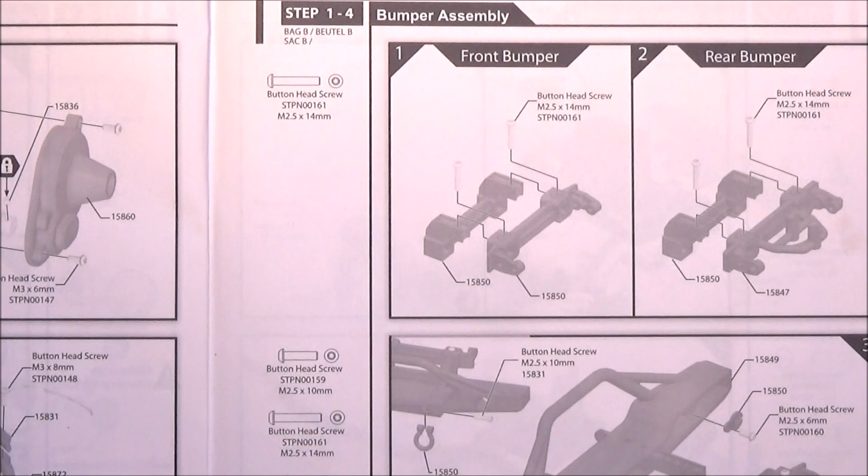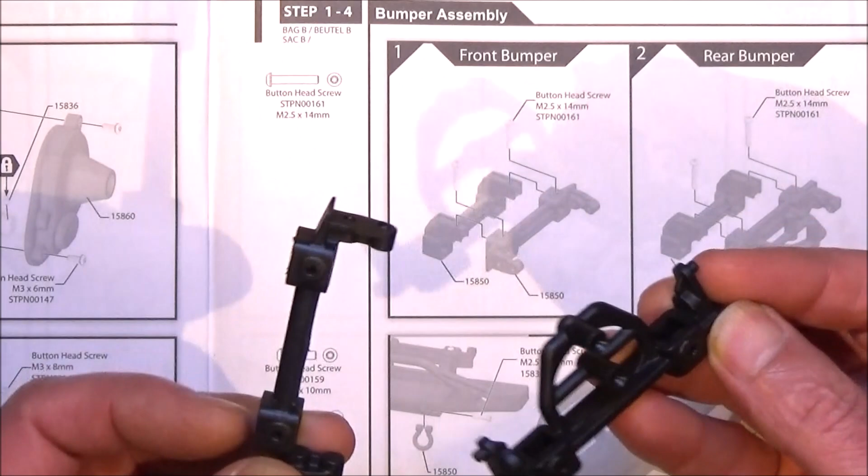Last time we finished bag H, so it's time to open bag I. This is for the bumper assembly, but I'm not fitting the bumpers onto my Range Rover, so all we need are these two parts, which fit on the chassis rails front and back. So that was nice and easy.

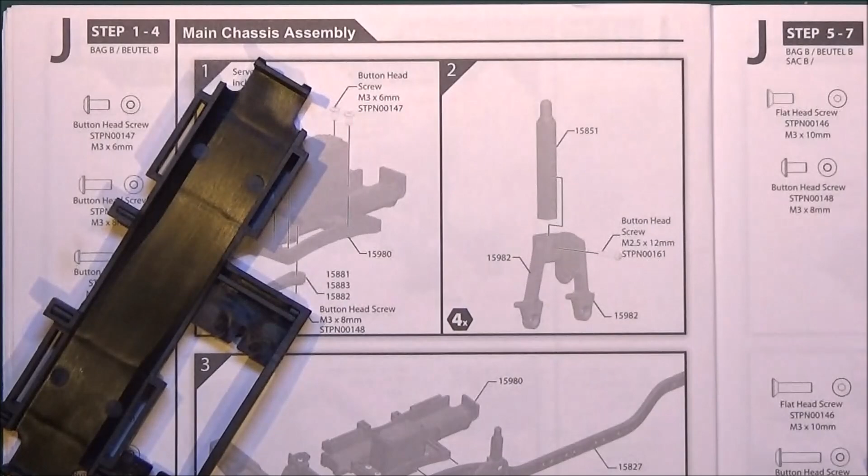Straight on to bag J. This is where we start to assemble the main chassis. What we're going to need is this piece here, which is going to hold the servo, and you need your servo, obviously not supplied with the kit, and you need to fit on the servo horn.

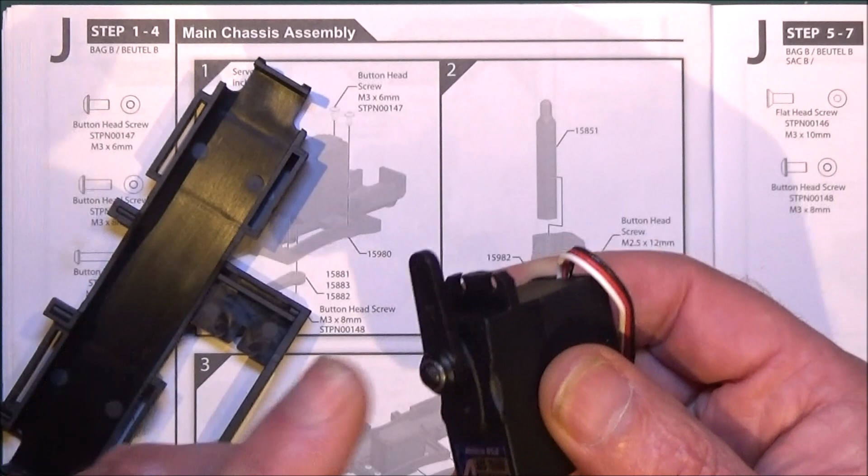There are 3 supplied for 23 to 25 tooth splines, and you need to fit that on with the screw. A bit of thread lock is advised, and then we just need the 4 6mm screws to hold this in, with the servo horn pointing towards the front like that, so I'll get those 4 screws in.

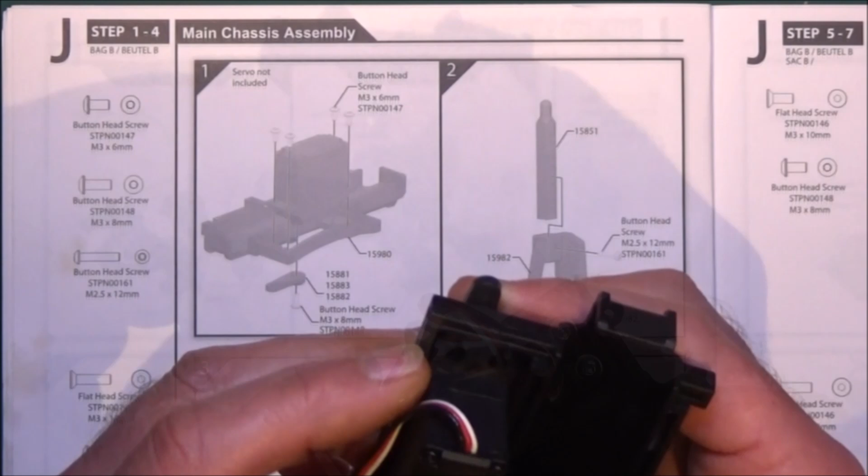So you can probably see the 4 screws there. I've used some spare stainless steel ones that I've got, and put some washers on also. So that part's finished, and I'm going to use more of those stainless steel screws wherever I can, the ones I've got that fit anyway.

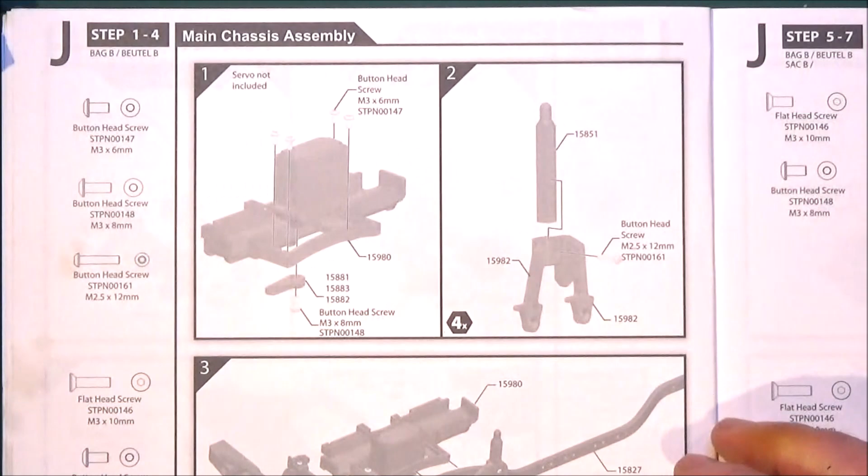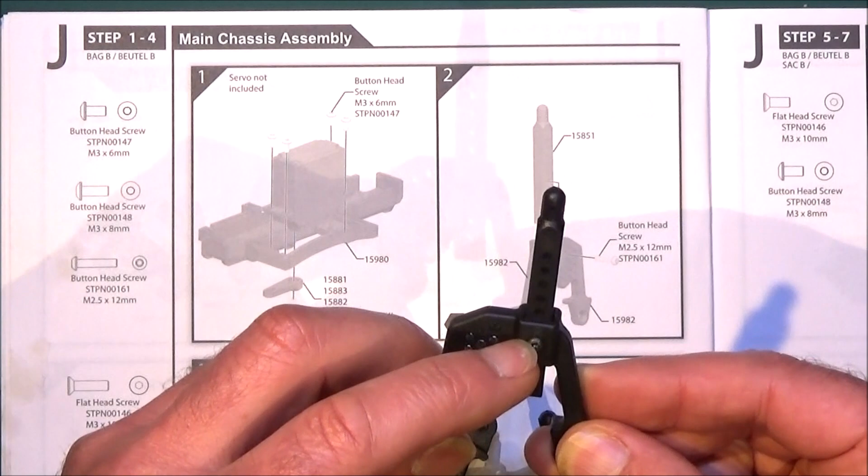Step 2 is just making up the shock holders and the body posts. Depending on your kit, for the Range Rover, the ones in the rear you have to put on the 4th hole from the bottom. So put the screw through there, and on the front you see there's an F denoting this is one of the front parts.

You need to put it on the 6th hole up from the bottom for that screw. So make 4 of those, and let's get on with step 3.

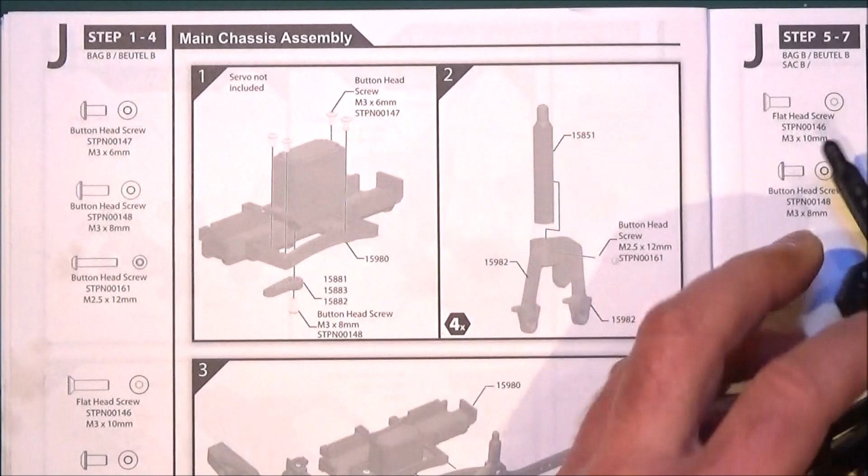This is where we're going to need for the first time one of those metal chassis rails, and I think it's the one with the curve that points towards the front. Obviously the bent channel goes to the inside, and we need to screw these together.

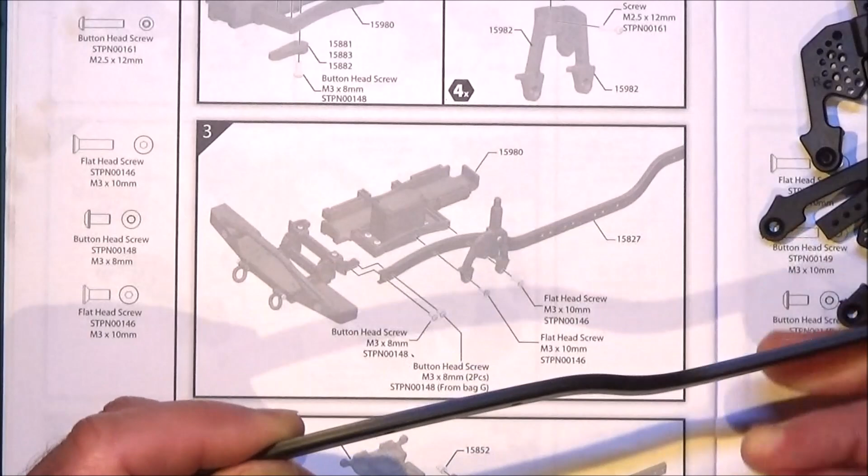So we need the front left, so there's an F and an L. Okay, that's the 4 screws in - there's the 2 countersunks and the 2 button heads, and that's the end of step 3.

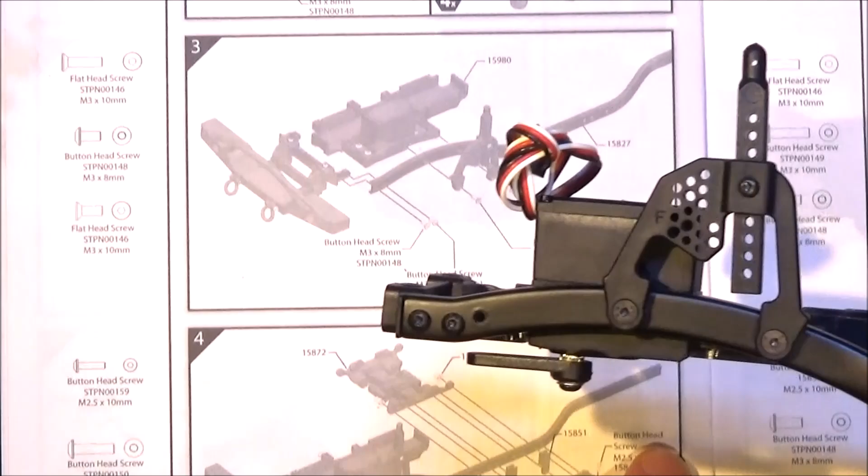So on to step 4, where we're going to be attaching this centre part and the rock slider on the side. There's also 2 little battery clips it looks like, so I'm going to screw those on first, I think.

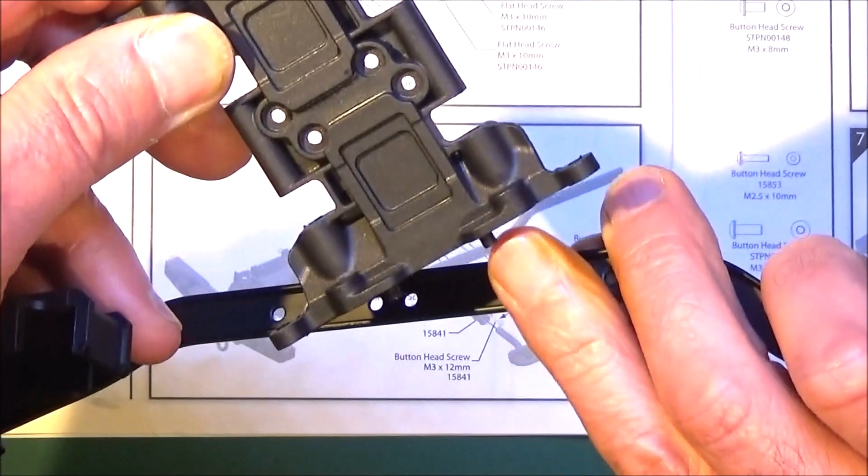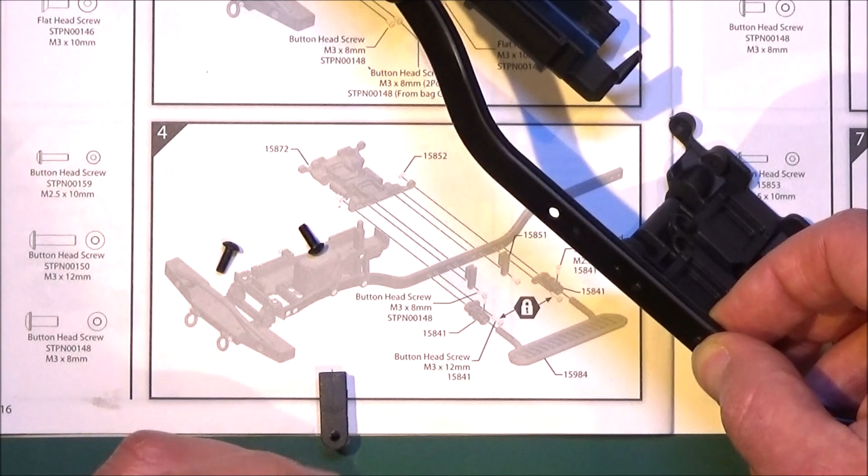This has got 2 lugs that go through those 2 centre holes, the middle of the row of 8 holes, like so. Then we've got these 2 clips with the 8mm screws that go on the next hole out, I think. Okay, like that.

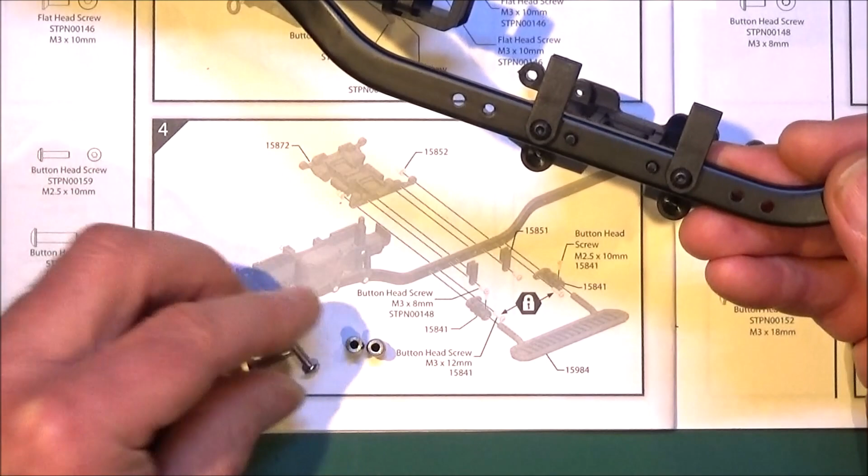And then we need the 2 ball joints, some 12mm screws, and 2 of these, and that's going to go in place like so, with the ball joint holding it all together. So do the same on the other side and nip those up.

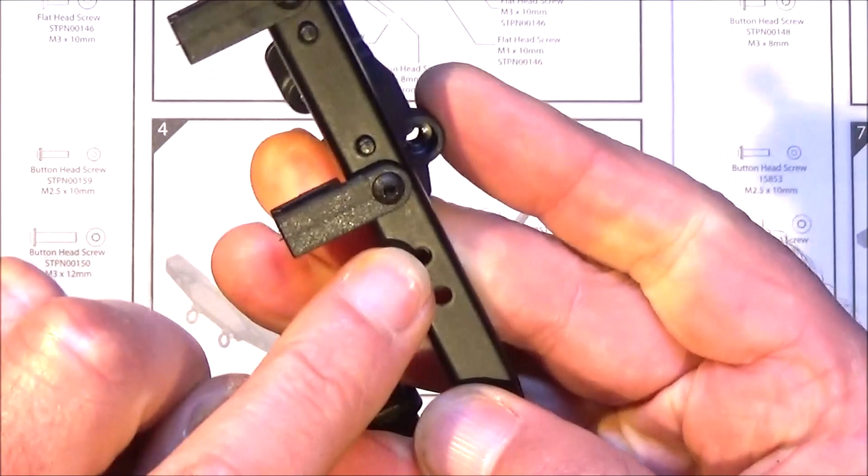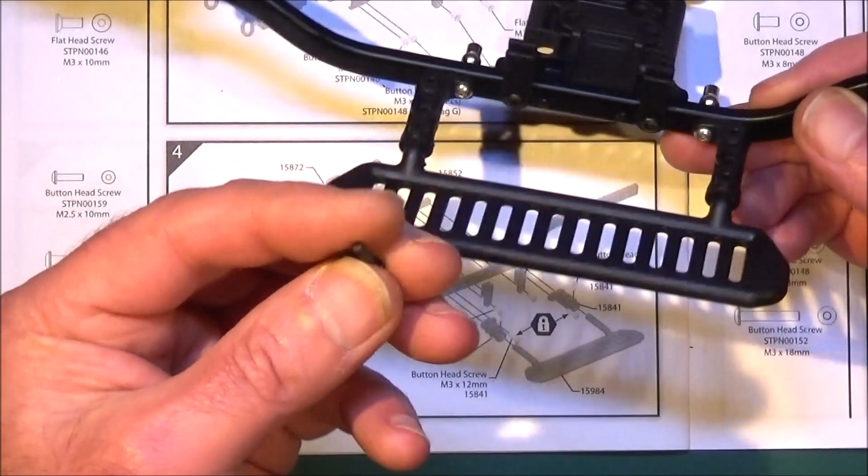So it should look something like this, and all we need to do now is get this rock slider, push that in as far as it will go, I think. It shows here 10mm long, 2.5mm wide thick screws, but the only ones I can find left in the kit are these, about 13mm long, so they're the ones intended for it, I assume. With the 2 screws, one there and one there, that's the end of that step.

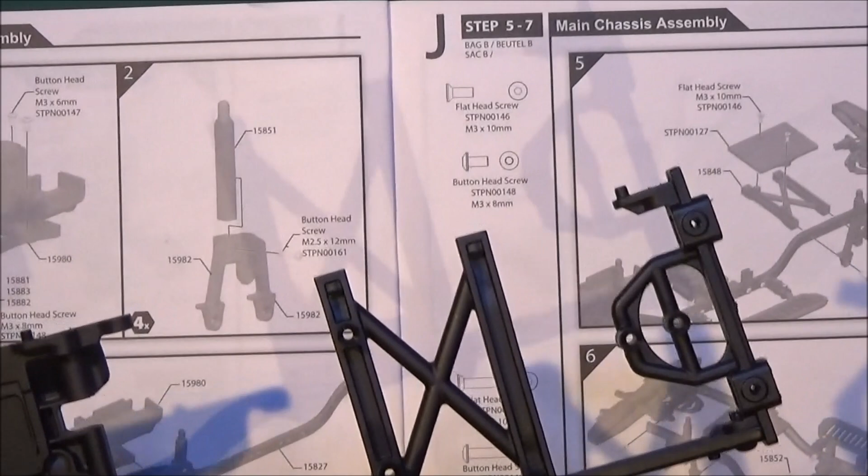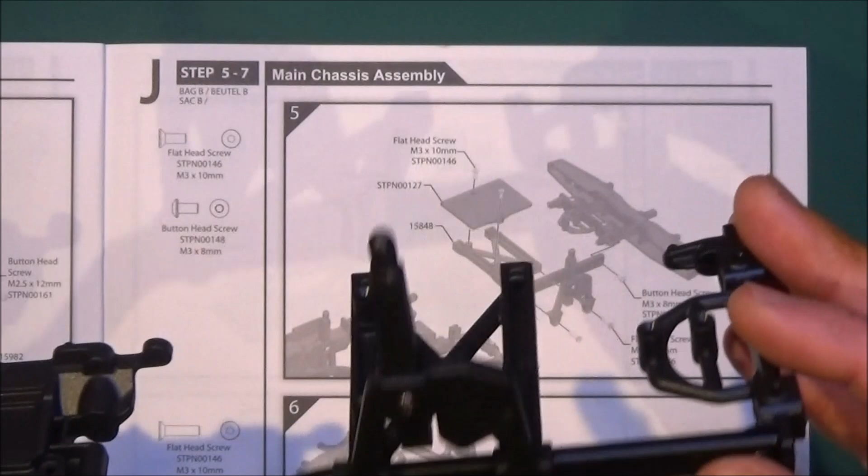I've also skipped on to step 5, which is attaching the other shock holder and body post holder. You've got the R there for right, and an L for the left hand side of the chassis. Then there's this cross piece here, which fixes on through there with the 2 countersunk 10mm screws.

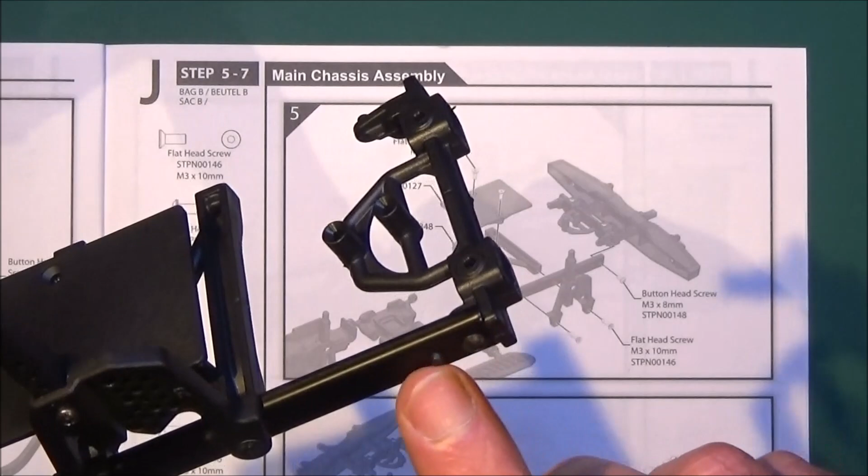All we need to do now is get this part, this flat tray, and that clips over these 2 lugs, and we're going to put the 2 countersunk screws in there, not forgetting to put the rear bumper mount right on the back, just 1 8mm screw holding that on.

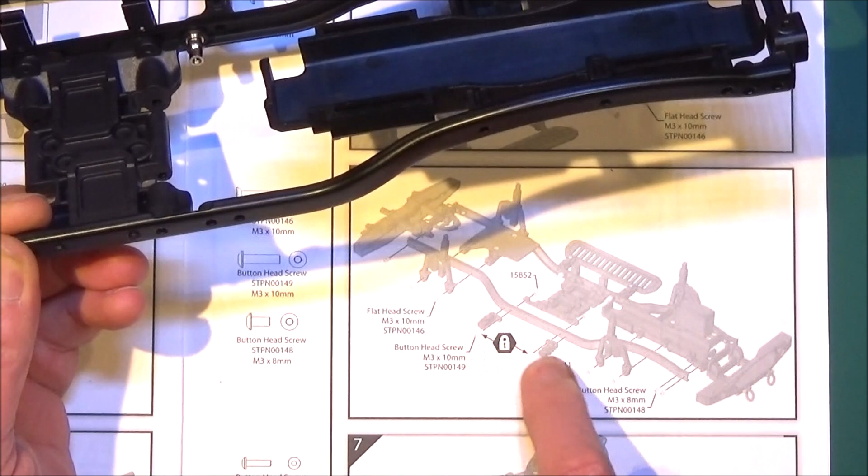On to step 6 then, where it's time to fit the other side of the chassis rail. Again, you've got these little lugs that are going to fit through the rail. It just gets it all aligned, and then we're going to get those two pieces again that hold the rock slider.

There's the ball connectors mounted with a bit of thread lock. I've also put on the shock carriers, the top shock mounts, the 10mm countersunks there, front and back.

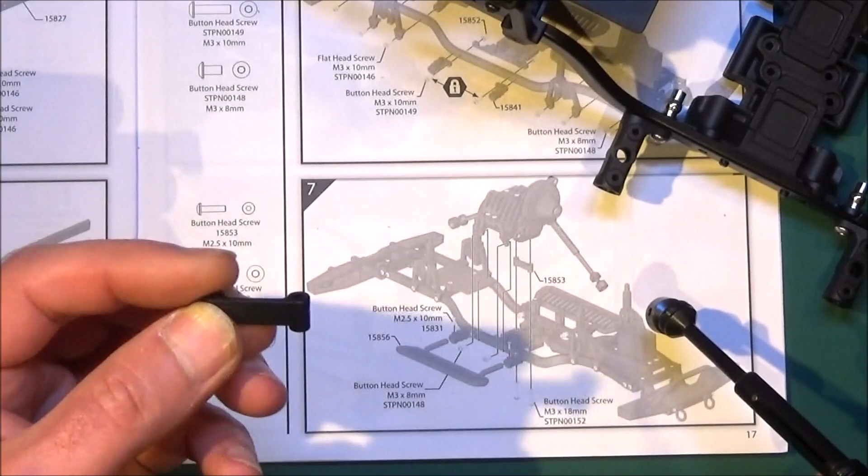Note the alignment, and there's one screw to go in the back and two 8mm in the front. On to step 7, where we're going to be fitting the motor and transmission. This needs this small plastic part that's going to fit onto the bottom of the differential, and then that's going to screw from underneath. So we're going to locate that into these holes here, or this slot.

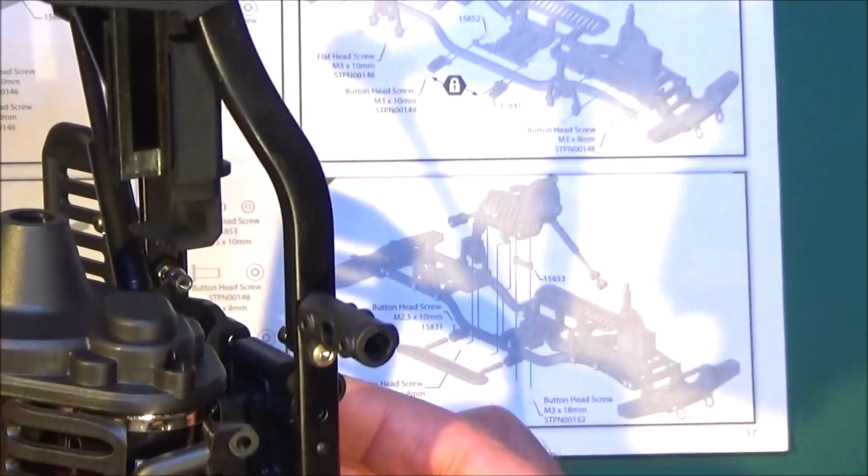I've just placed it on this central piece, the screws underneath and that plastic part, and I'm going to try and line that up and get those screws in. So with those two screws in, that's held that nicely in place. We've just got to put two screws in here, which are 8mm button heads. So there we are, they're both in.

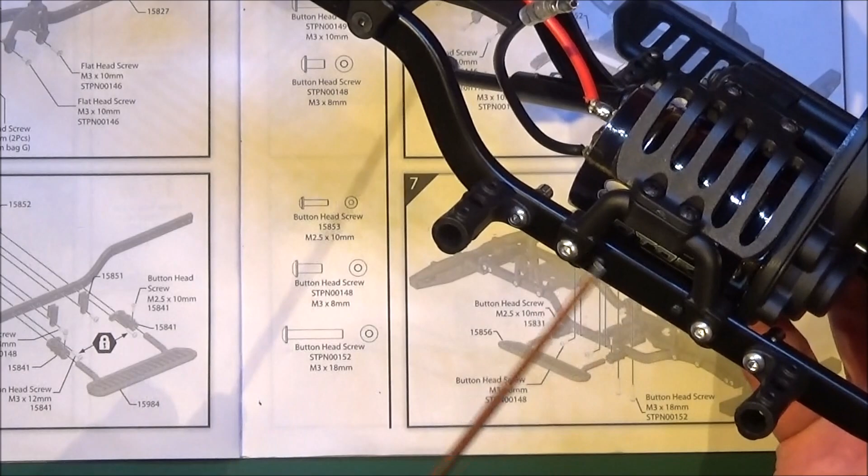Just a quick note, these two screws that the manual says are 10mm screws that hold these pieces on and into those ball joints do actually need to be 12mm. So yeah, 10mm is far too short, so that manual is incorrect there.

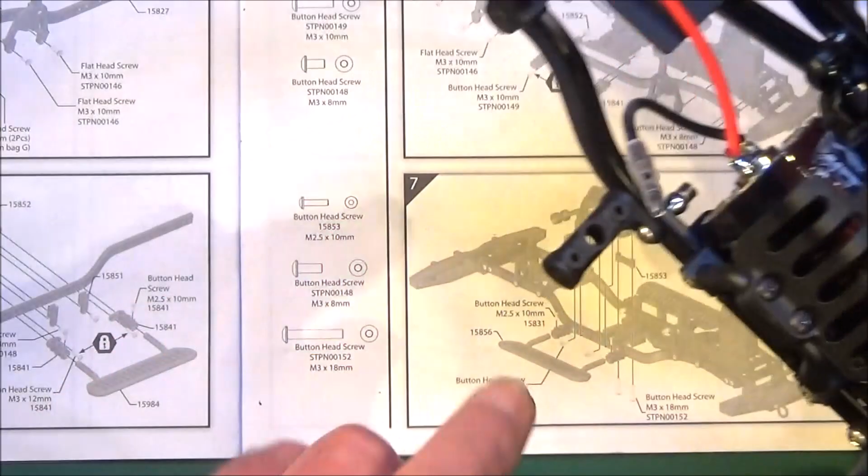Anyway, just to finish off step 7, we just need to put the other rock slider in there and secure that with the 2.5mm times 10 screws.

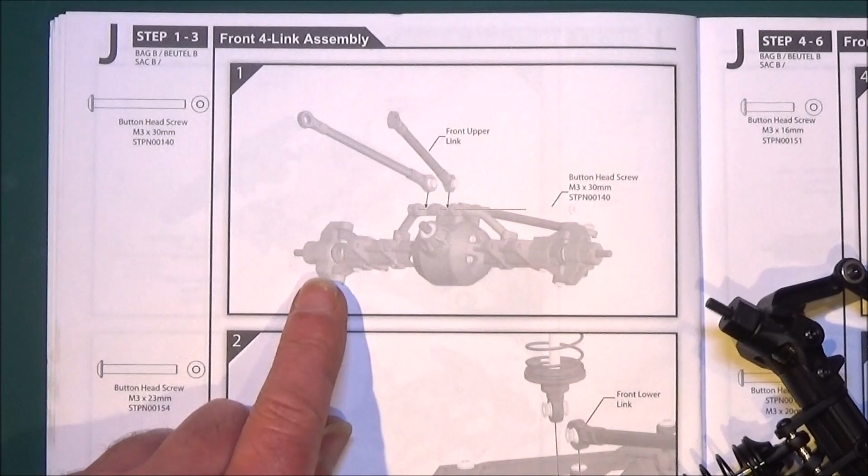Moving on to the 4-link assembly. This is basically what we've got. You've got your front axle. The first thing you need to do is get your front upper links, and then there's a 30mm screw that goes through and holds those ball ends in there.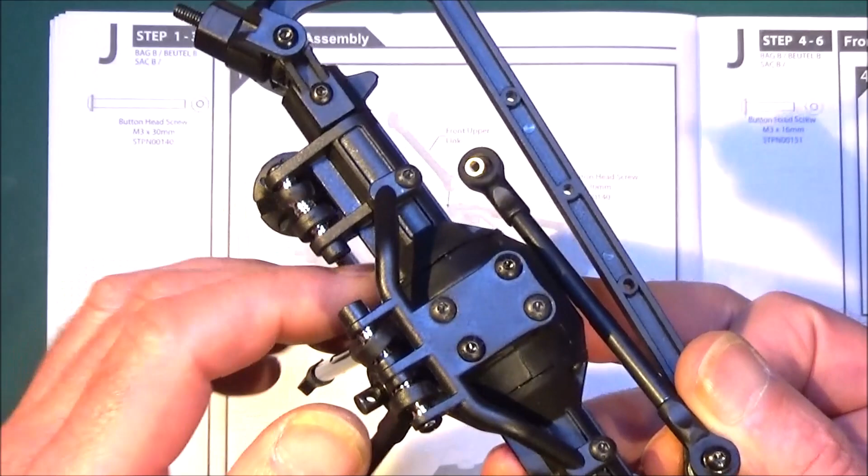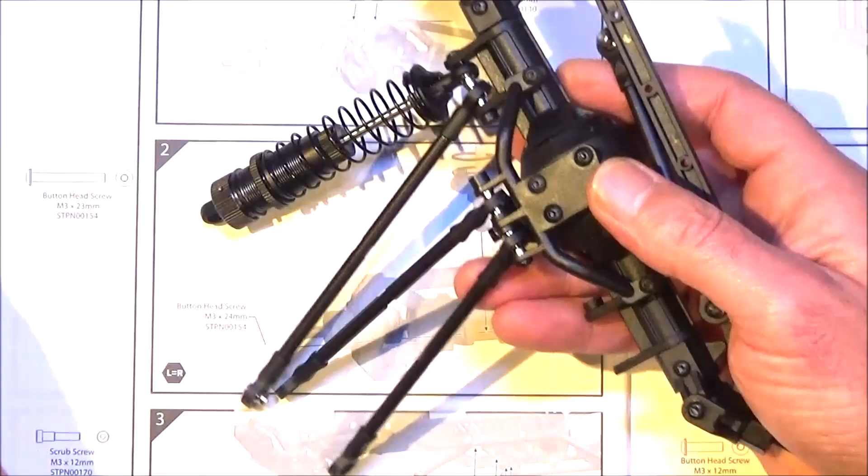And then you've got to go to step 2, where we're putting the lower link on with a shock like that. Goes in there, I'll just show you the side. It's very simple. So you get the other lower link, one of the shocks, and a 24mm screw.

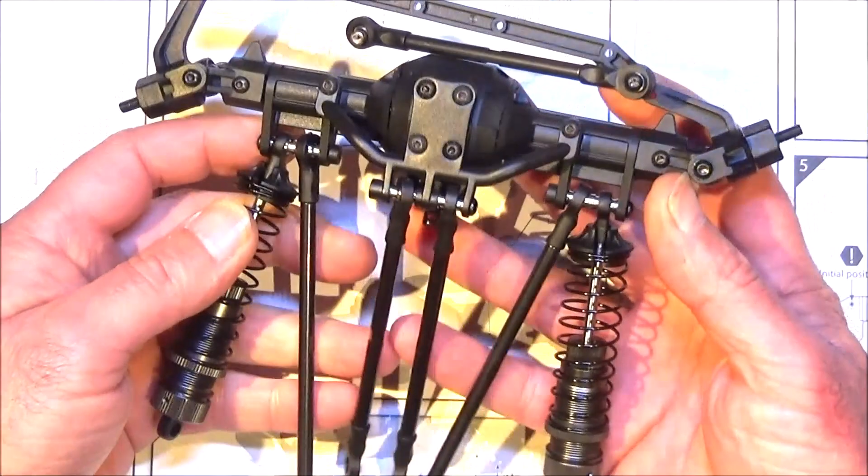It's just simply a case of the shock on the outside, then the link, and do up the screw. So that's all the links and the shocks assembled, ready to be attached to the chassis.

Get that manual out of the way, hopefully you can see a bit better what's going on. Get the axle like so, and the first thing I want to do is get the drive shaft connected. So again, you want the hole at the top with the thread in it, and not at the bottom, else we won't be able to screw it in.

Get this located over that shaft. I think what we need to do is get this bradawl, and I'm going to centre up the shaft in there so it's lined up ready. Then get your grub screw, and obviously we need a bit of thread lock on this. A good nip up. Okay, now we're connected up.

We're going to get these links without the balls in and pop them onto these ball ends that we screwed on before on the chassis rails, I think that's right. And then you've got the other two, they're going to locate into these two holes here, or two slots.

Again, it's a tight fit, and those are fixed in by a 16mm screw through each side. Just get those tightened up.

Then we need this plastic step spacer, a 20mm screw and a washer, and we're going to attach the top of the shocks. It says to start off with it on the highest mounting hole possible, so that's what we'll do. Something like that, and obviously the same for the other side.

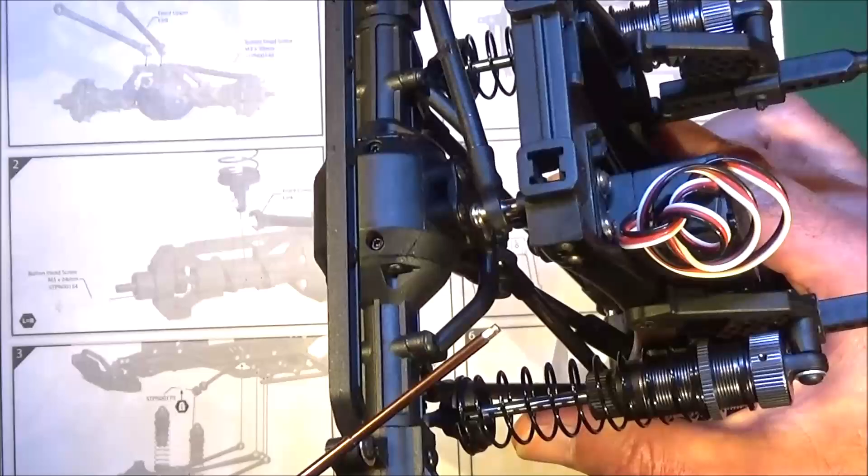So with the tops of each shock mounted, all you need to do is put a 12mm screw there to connect the steering arm with the servo horn.

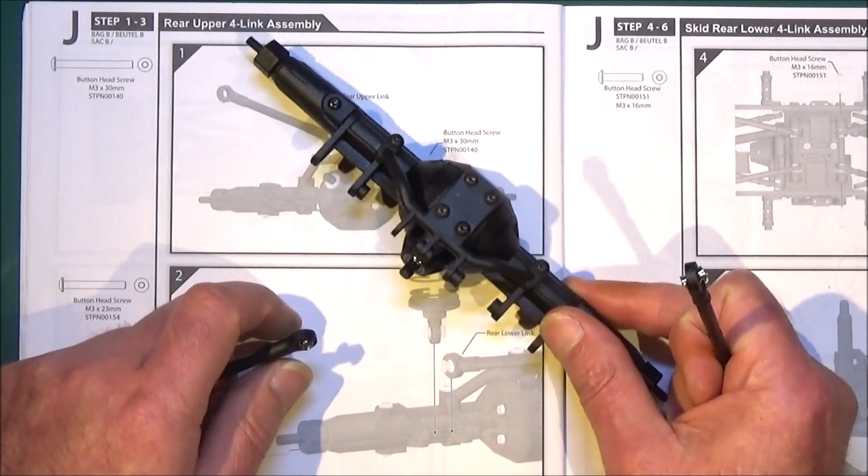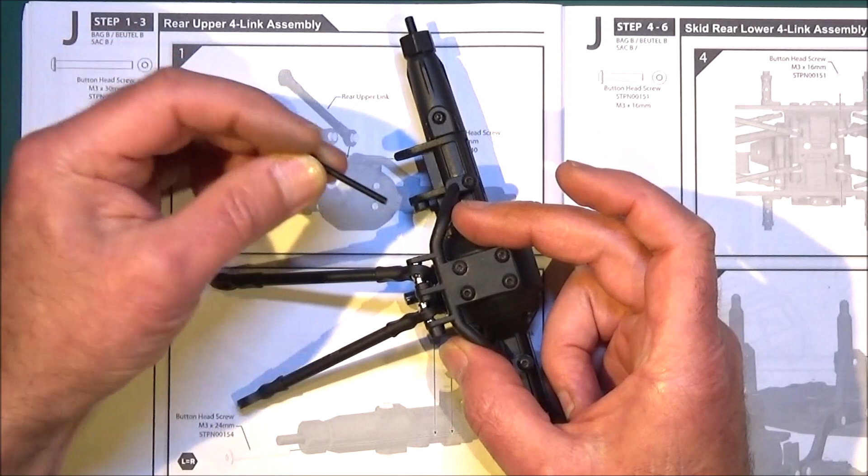So onto the rear upper link assembly onto the rear axle. So again, we just need to put those ball joints into position and then secure those with the 30mm long M3 screw. And again, it's the shock on the outside and the lower link, and then a 24mm screw, and that's going to hold these into place here.

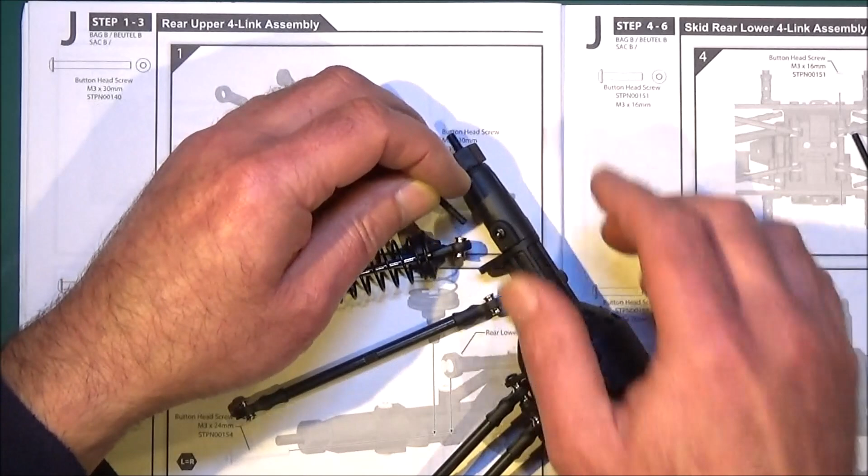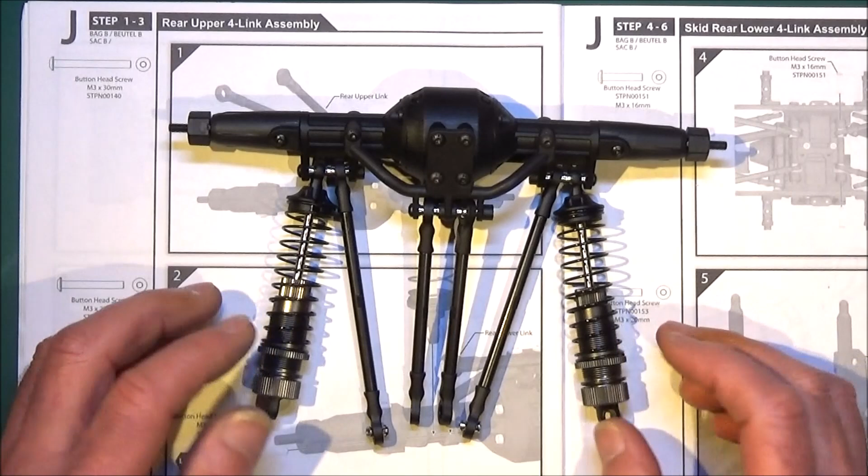Like so, and the same on the other side. The rear axle assembly should look something like this, and then we've got to fit it to the chassis as we did earlier. So let's get this out of the way.

As before, I'm going to connect up the drive shaft, or the prop shaft, first, get the screw thread uppermost, centre that with my bradawl, and get the grub screw in.

Okay, just pop on the upper of these links onto the ball joints, and then the 16mm screw is going to hold each of these ends through that central plastic piece, like so. Then just attach the top of the shocks exactly as we did earlier.

And with those shocks attached, that's pretty much the end of the chassis. It's looking pretty good, gone reasonably well I think. So what I'm going to do now is get those wheels done and fit them on, and that's going to be the end of this video.

So here's one of the lovely wheels I prepared earlier. It's very simple to do. Just take those screws out of the wheel and it comes apart - just 3 pieces like this, and your 5 Allen screws.

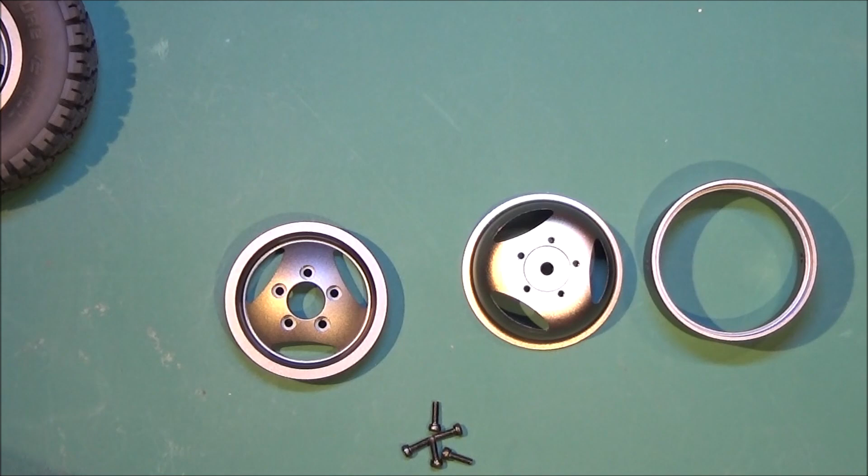Basically get your tyre and put that central part, or the bead locker, in the middle. These tyres, I've got to say, are very, very soft - my fingers are almost sticking to them. Once that's inside, you need to put this lip over that recess there.

Get it somewhere near - it should come together when we get the halves of the wheel in. I'm going to put the back piece in first, it's a very good fit. Now you've got to be very careful, because it's easy to get this mislined or misaligned, so try and match up the holes and the spokes before you start putting the screws in. That looks about right, lining up.

What we need to do is get the first screw in place. Just screw it lightly in, don't screw it too far, and get all the others in very loosely before you start tightening them up. Be careful as you go, because being alloy that we're screwing into, it could be really easy to strip the thread or get it cross threaded, so you should be really careful with these.

I hate to spoil them. Okay, so that's them all loosely fitted. Now I'm going to go round opposites and screw it up bit by bit until it's all the way clamped in.

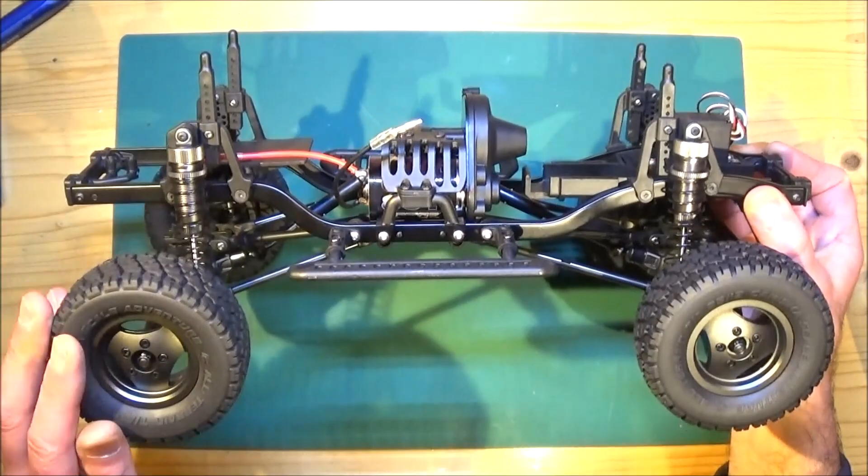Then that's all the wheels together and fitted, and don't they look fantastic? Well, there we go, that's the chassis pretty much done. I've just got to get some electronics on it and it'll be ready to test.

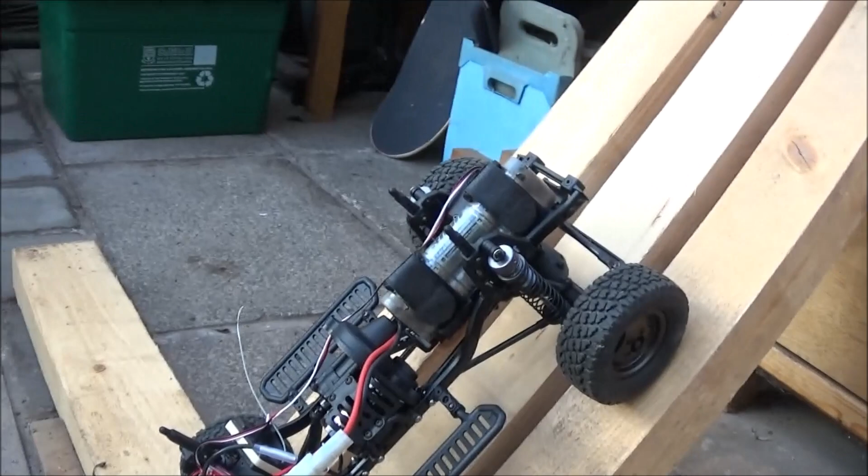Hello there, this one's for you, Derek. Hi mate, this is the finished SCA-1E. I said it was going to climb up some wood - okay, it's not vertical, I know, but it's pretty blooming steep. And I'm here in the garden just messing about.

Here we are, got my twin stick, so I'm going to have a go holding this handy cam in one hand and having a go up this slope. I think it's going to go on 3 wheels because of the torque, I think - maybe you can tell me that - but it's got that 80 turn motor in Derek, and I've got a 20 kilogram servo in there. So let's see if we can film it and drive it at the same time.

As you said, it's got a lot of control, but it is lifting that one wheel - I don't know if you can see. Is that normal? But yeah, so 3-wheel drive, up we go.

And go really slow. I think I've got that in view just about. But I'm not sure if this drag brake's working properly, so I think we're at the top-ish. Way!